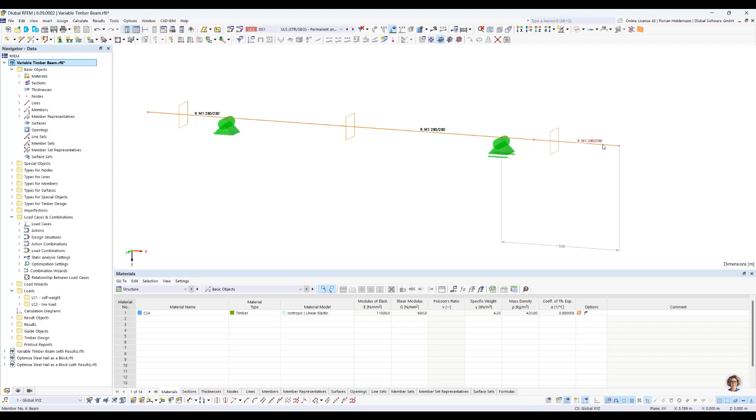So let's dive into the program. And as you can see here, the first model is a variable timber beam. This one has nothing to do with blocks at the moment. It's just for demonstration purpose of the new features I just explained in the PowerPoint. So what do we see here? We have an easy static system. It's a single span member, and at the ends there are some members reaching out on the left and on the right side.

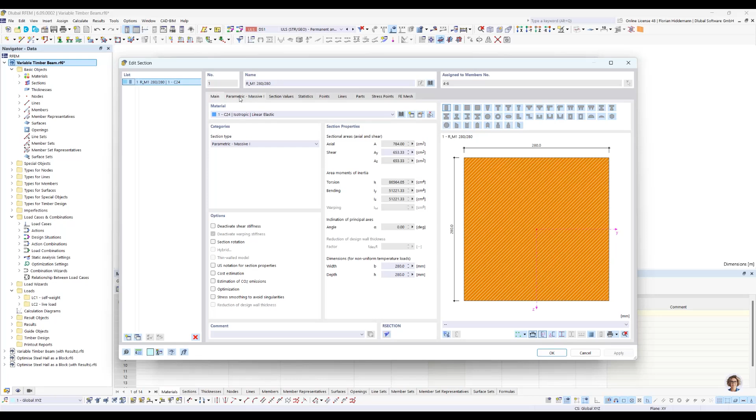It's a rectangular cross-section. And of course, when we are dealing with optimization, there are some global parameters in use. So we start here with a 280 by 280 cross-section with C24 timber material. And as you can see here, the cross-section width is given with a global parameter and the cross-section height also. In addition to that, the distance of the right support is also variable. I can show you now here the overview for the global parameters.

The beam length is just a constant, which is easier for me to make the model. The height is 280 by 280. The distance of the support is variable.

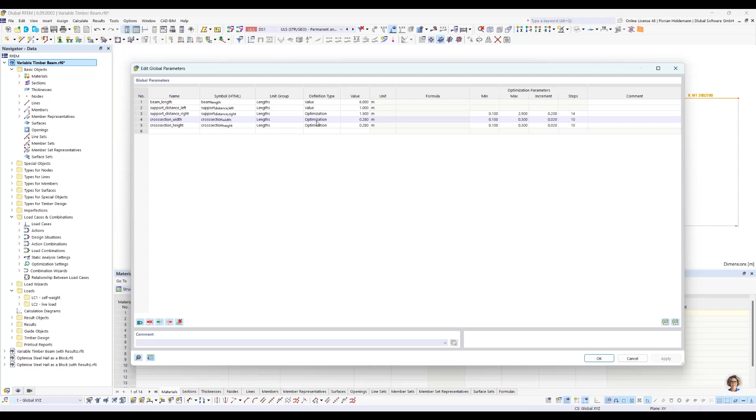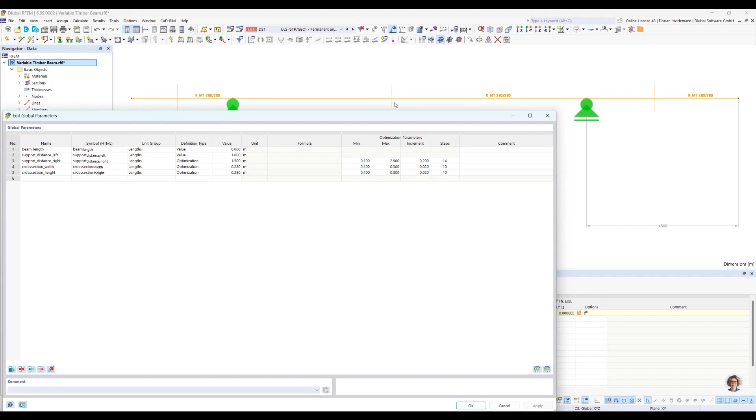And the left support distance here is just a constant. And we would like, in this little example, to find optimal solutions for the right-hand support distance, which is now 1.5 meters, and for the cross-section width and height. This parameter here, the support distance, can be varied in 0.2 meter steps from the right side up to 2.9 meters, which is nearly in the middle of the beam. The cross-section width and height go from 100 millimeters to 300, in steps of 20 millimeters. So you have 10 steps in between, and this is the variation this cross-section can take into account.

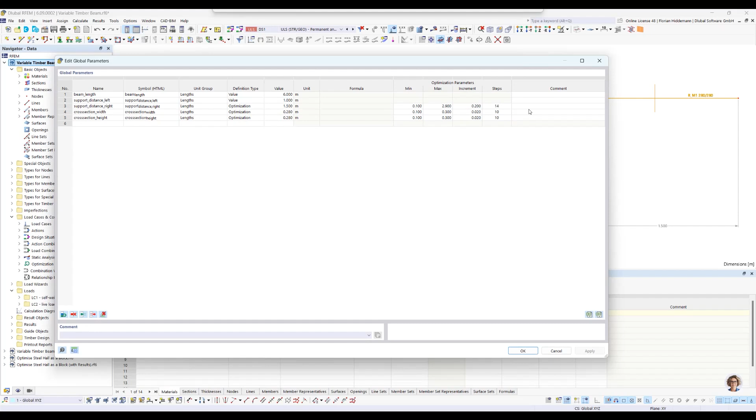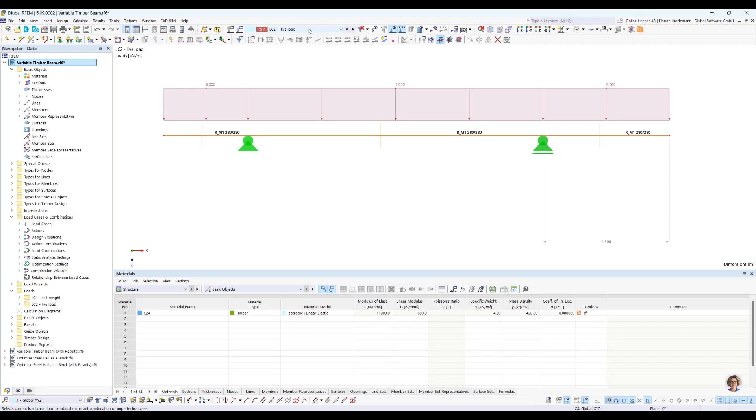So let's have a look at the first feature: recognizing valid mutations in the result list. For this reason, I activated also the Timber Design add-on. As you can see, Timber Design is activated. And I just made, for demonstration purposes, easy loads. You see load case 1 with some self-weight, and there's another load case with a live load. We use here the German National Annex, of course, and a combination with it.

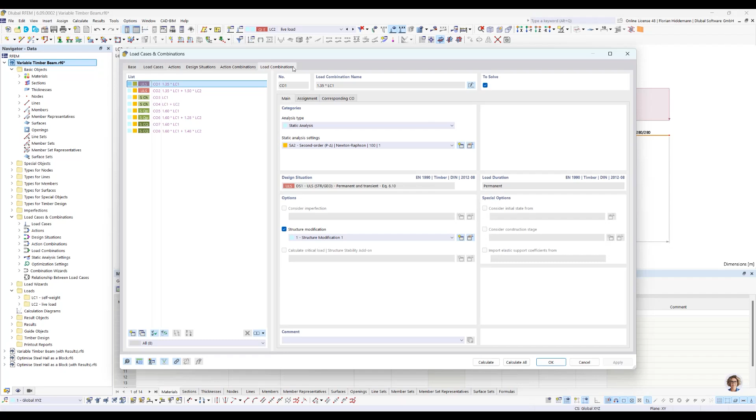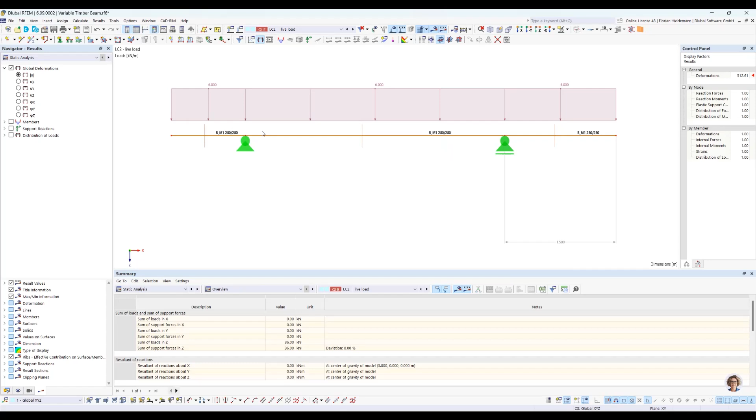So you can see design actions. It's all standard, which you are maybe used to already, that we do some combinations and design situations for you. So you don't have to worry about all the timber design specialties. So let's calculate the system in the first place to see what we are talking about here. So now it's a standard calculation without optimization. You can see in each run later on, all these calculations are performed for each mutation.

And as we can see in the governing results of the design add-on, everything in this configuration looks fine.

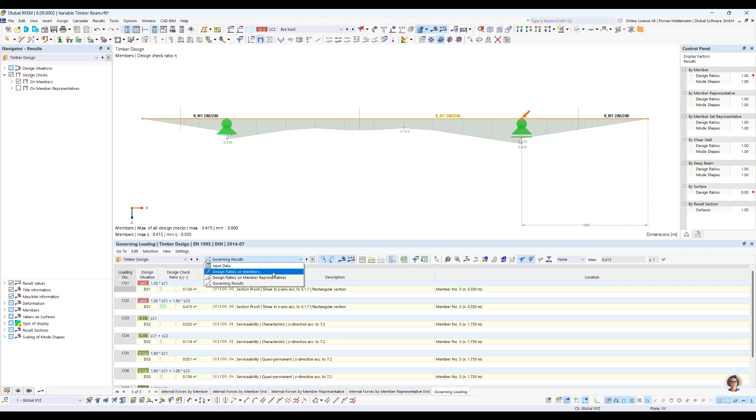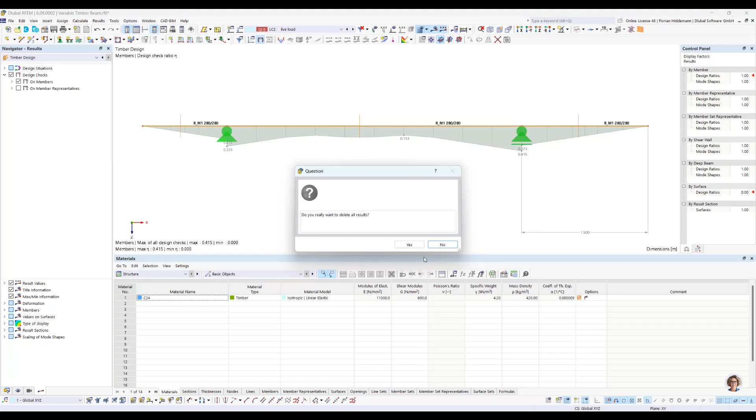But we are here to find out if there is an even better configuration or not, and to play around with our optimization feature to see what is happening there. So let's delete these results and jump into the optimization settings. You can find it here under Calculate if the optimization add-on is activated.

You can store different optimization settings. It's not necessarily one you have to fiddle around with. You can copy it, modify it, and use them for different purposes. This is quite handy because there are a lot of settings you can do, so you can remember each different optimization run later on.

So what do we do now in the first place? This feature I show you later on: this is the multi-stage mode, the multi-stage calculation. And even with this very simple system here, all mutations would have a total number of 1,815 optimization mutations. This is a lot if you consider that this is a very easy and simple system. And for this reason, we are trying to develop more and more time-efficient strategies to find in a fast way the optimal parameters for you.

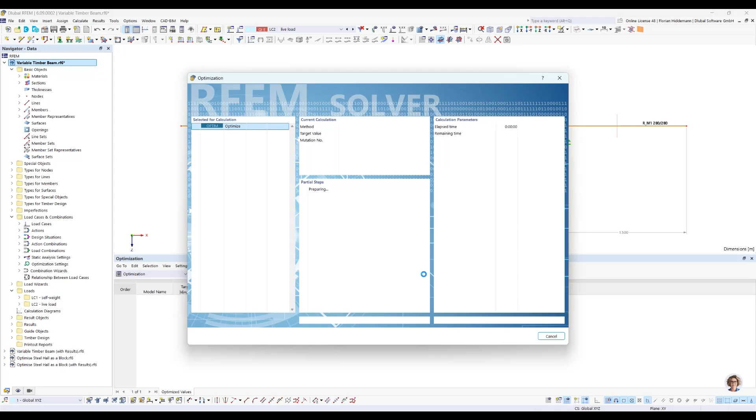As you can see in the background, the first iterations are calculated. Each one of these mutations is also calculated within the Timber Design add-on. For this reason, you see model number 1, calculated with these parameters, didn't fulfill the design checks. Model number 2, like in our first example, fulfilled it. With this algorithm, it's just a random mutation; there is no clear strategy for finding the optimal target value. The program is just giving random examples for these 3 parameters and collects all the results.

With this nice feature here, we can see easily which calculation fulfilled the design checks and which not. And now if I cancel this calculation run here, today I will be mean to this model and cancel it anyway. What you can see here, the calculations performed up to this point are stored. We have now 8 results. And as you can see here, the green checkmark means, it's very important to see it again,

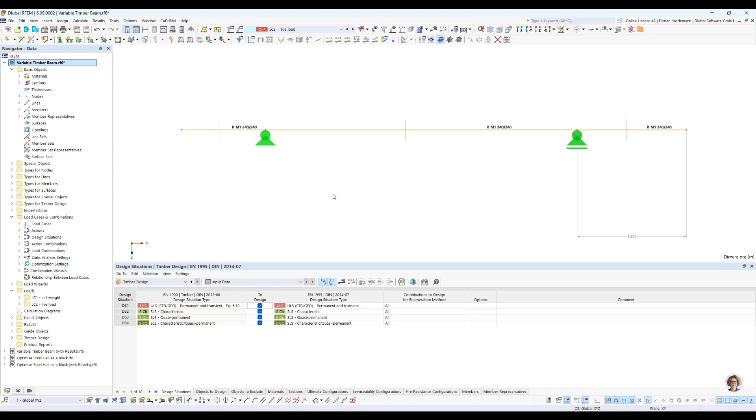this model is now active, and because I canceled the calculation run, the add-on doesn't calculate the last cycle. So if you jump into a new model in the list, you have to calculate the model itself. We store only the results you can see here in the list. Obviously, we don't store every full result calculated for each model. With a bigger model, that would be hundreds or thousands of results. But we collect the target value and everything you need to display this result table.

From this point, you can then regenerate your model, because the add-on varies the parameters as they are stored here in the model mutation. So for this model number 7, I calculated it now, and here's a green check mark. This means that every design check here is fulfilled.

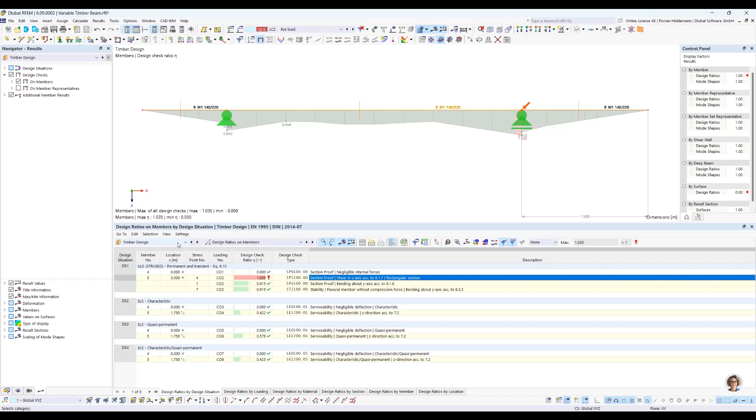So let's see model number 1, for example. I change it here and perform a calculation to see why there is a red exclamation mark. And as you can see, close, but it doesn't count. The section proof here at this point on the left side is not fulfilled. So this is the way this list works with these indicators.

The next feature: the results list remains consistent. It's easy to show now because I canceled the first calculation run, and maybe at a later point we would like to go for a new optimization run. So all I do now is say, okay, try to optimize it with a particle swarm, calculate 2% of the possible optimizations. As every time, I make the optimization cycle active. This is kind of a safety feature so you are really aware you're performing an optimization run and not doing it accidentally if you calculate all.

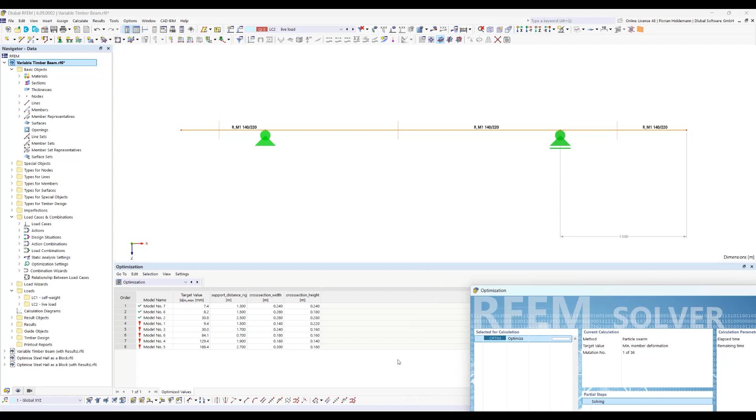Okay, so what will happen next? You can see the results list here is stored; there is no new list. This is a small feature, but very useful if you already spent some time calculating your model, because now the optimization add-on checks each new mutation. Before it calculates it, it looks into the result table to see if this mutation was already calculated. If so, we jump automatically to the next mutation without calculating it. And if the model mutation is a new one not stored in the list, the add-on just calculates it and adds it, like you can see here in the background.

So as you can see here, now it's more straightforward because the particle swarm is a solving algorithm which tries to vary these parameters with the target value in mind. And the more you calculate, the more it is getting, let's say, a mathematical feeling, which parameter needs to be adjusted in what way to achieve the best target value, which is at the moment the minimum member deformation at every point.

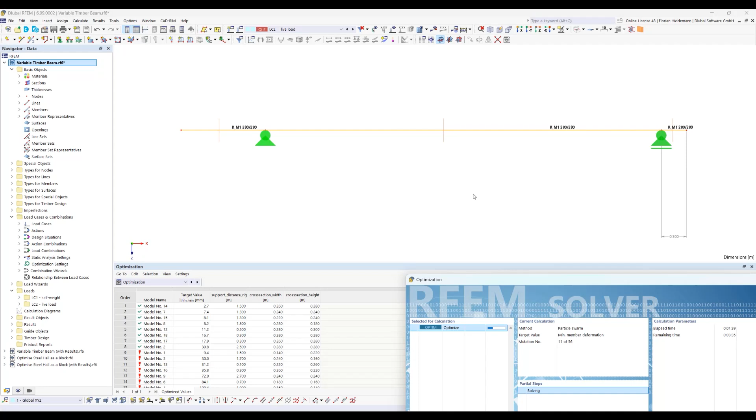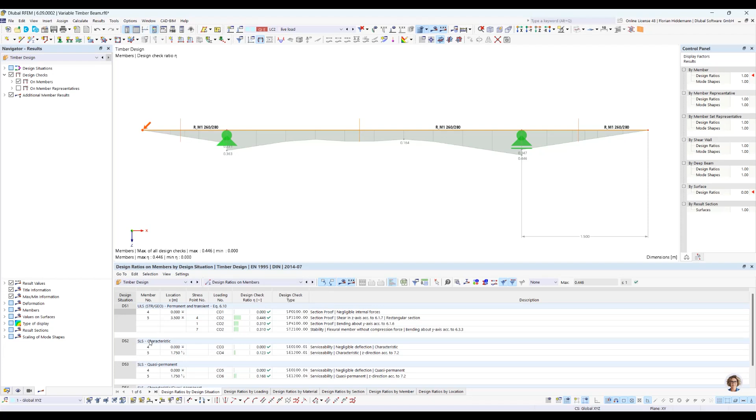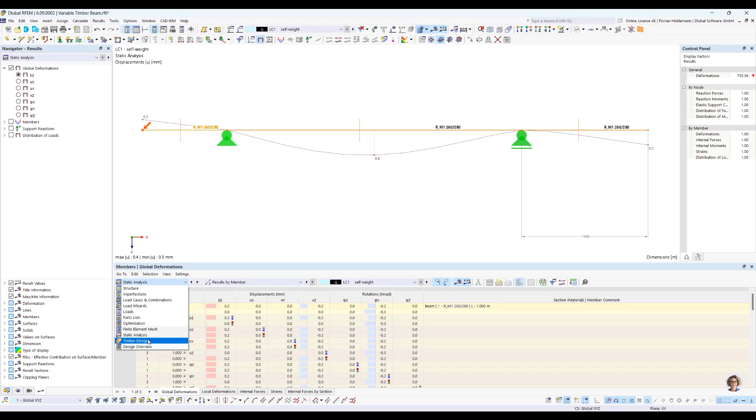So the 2.7 millimeters, let's have a look into the program and cancel it again. Because we abort the calculation, I need to perform a manual calculation of the system here. So let's see. Every design check is fulfilled. And for the target value, it should be there. I go to the other model. Okay, I found it.

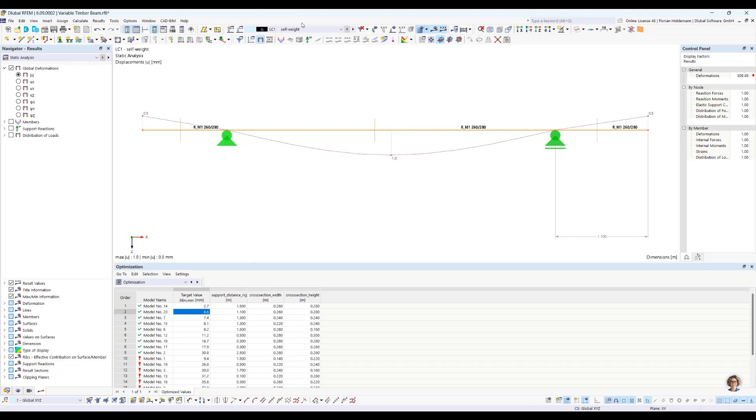Okay, we are looking for 6.6, and this is considered over all design situations you set up. So if I go to the maximum load here in design situation 1, the ultimate limit state, you can find this part here in the members is 6.6, and this is considered as the target value. It is looking for a global minimum to minimize the maximum member deflection at any given point. I give you some time to let it sink in.

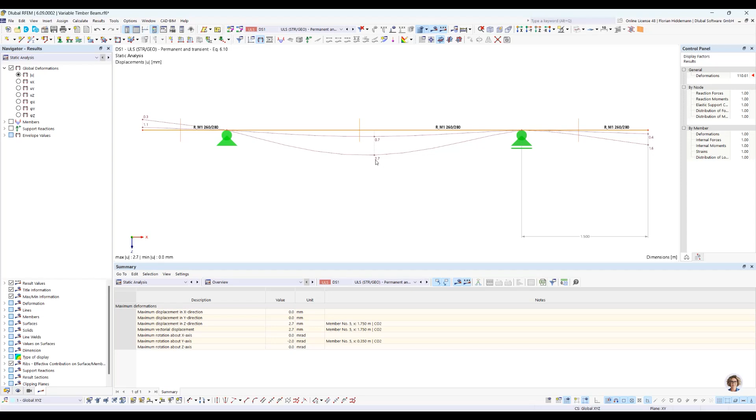And now we are able to find the 2.7 millimeters, just to be sure what is going on here in the background. You can see the 2.7 at this point. So this is a small introduction example for working with the list here and the ability that it stores every optimization run. Let's go to the next topic, the sensitivity factors. What is going on with that?

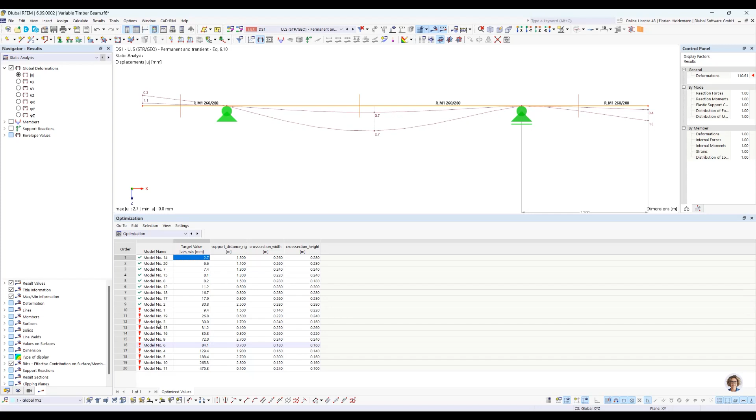In the model now, we have 20 model mutations calculated. And now here in the table of the parameters to optimize, you can see some sensitivity factors. They are estimated from the model results list here. So we can now perform an analysis of how the target value is influenced by varying different parameters. This estimation gets more accurate the more models you calculate.

With this small amount of 20 models, you can see the cross-section height has a big impact on the desired member deformation, a much bigger impact than, for example, the cross-section width. If you're familiar with how the stiffness in such a system works, that's absolutely plausible, because the height of a cross-section goes with the third order, and the width with the first order into the stiffness of this beam. So it's a very plausible result.

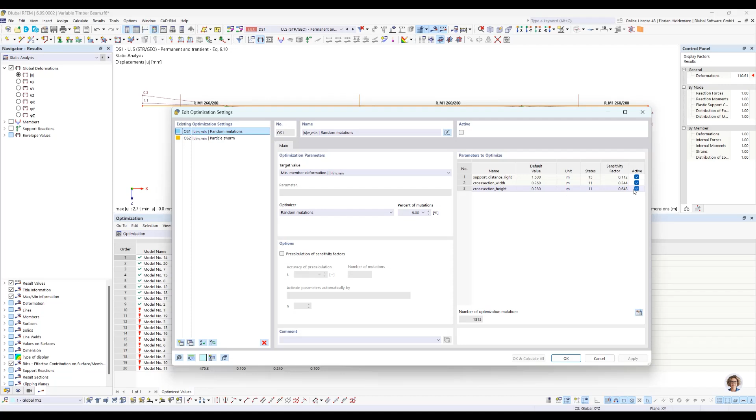And these two parameters have much more influence than the support distance. That's something you can already see in this little model. Here it's easy to have an overview by yourself, but think of more complex situations where you vary different parameters and you don't have a feeling for what would happen if you vary different combinations. This is very nice to reduce the number of optimization mutations, because you can choose, okay, if these ones are so impactful, why should I spend my calculation time varying this one?

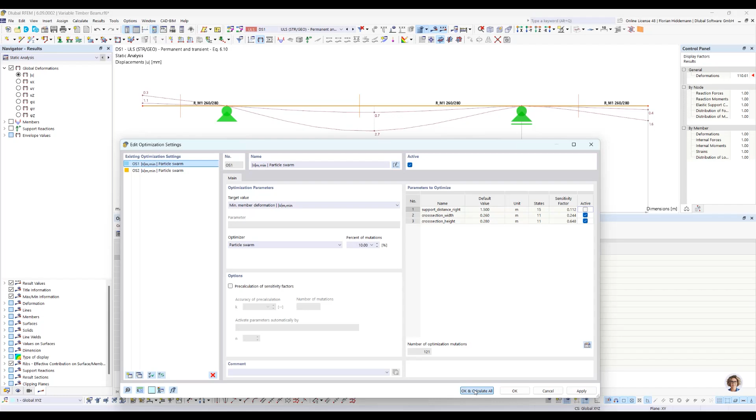And as you can see, it reduces the number of optimization mutations drastically, because now it's 11 by 11 and not by 15 anymore. So here we have 121 mutations. And this is much easier for the algorithm to find potentially better mutations. So now, because I set only these two parameters as active in this dialog, the model is fixing the 1.5 meter support distance and just varying the second and third one.

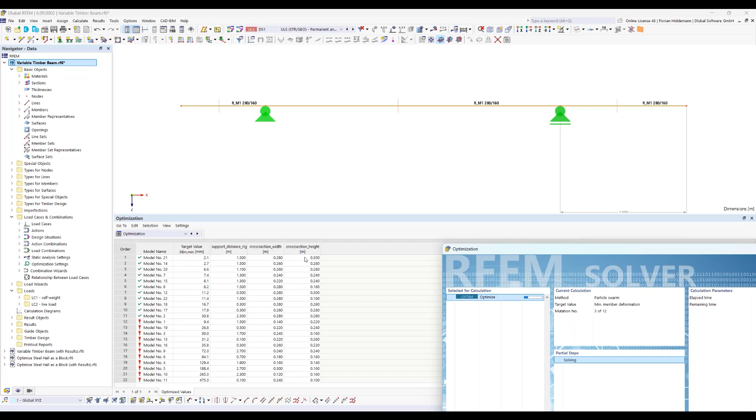Okay, this as a basic introduction and reminder of our new features at this stage. I can show you the multi-stage calculation as well, and for this reason I go back into the settings, and we choose other optimization settings here, and now we have a look into these options here: the pre-calculation of sensitivity factors.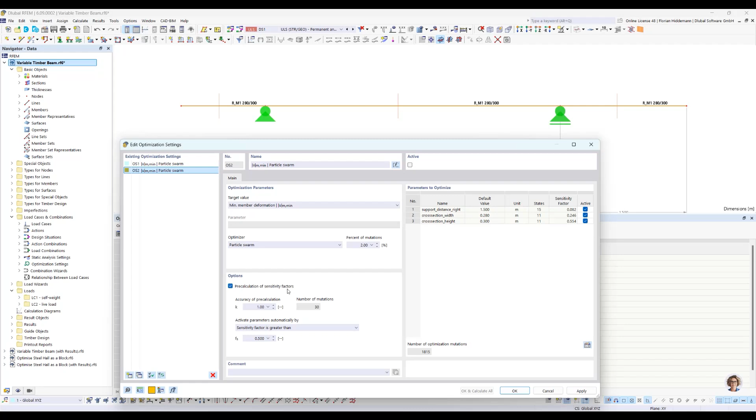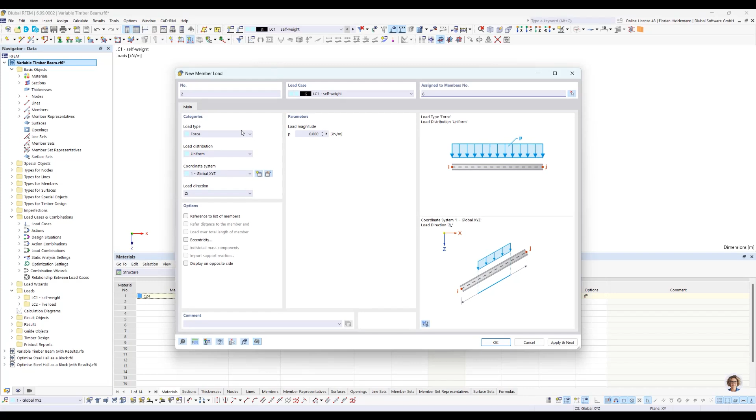For this reason, I will empty this list by varying the model. This is something you need to do now, because the list is stored. What I do now is delete a load here. And if you change the model in a drastic way like this, all the results are deleted. So be aware that this will have an impact on your optimization results. So now we can start with a clean structure here. And for the next run, I say, please make a pre-calculation of the sensitivity factors.

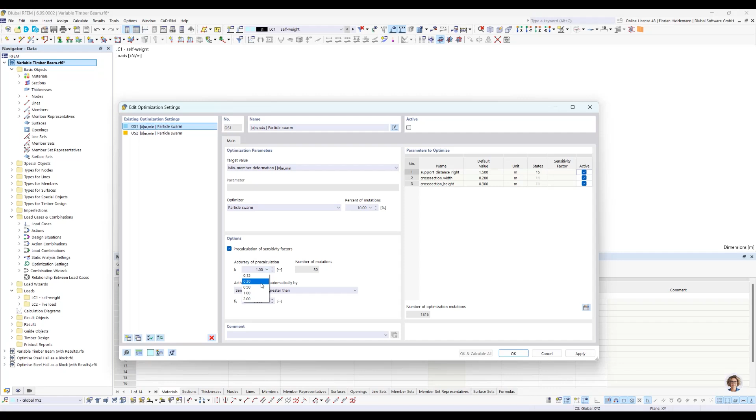And in this example, let me make only a small guess with, let's say, 4 mutations. And after that, the program should automatically combine 2 parameters in each following optimization run with the highest sensitivity factors. So it's kind of a bit abstract and complicated, like most of the things with this add-on, but let's see what is sticking behind.

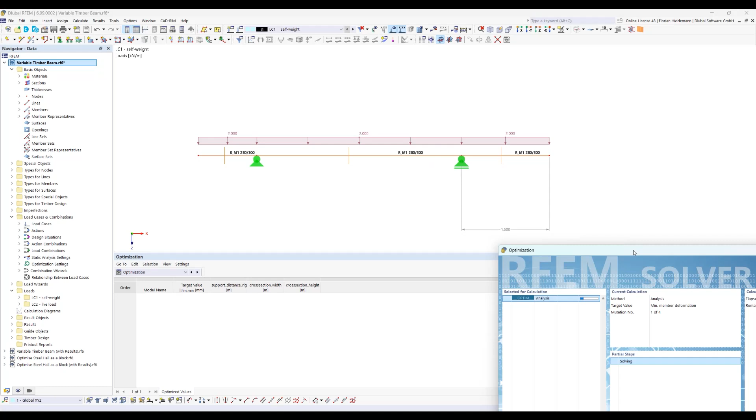So now we have a multi-stage calculation. In the first place, we are doing the analysis. So the model is now varying some parameters with a very small amount of models to guess the sensitivity factors. It's analyzing the results here and the estimated impact of these parameters to those result values. And as said before, the more mutations you calculate, the more accurate is this estimation.

And now it goes to a second step. It uses now the results from the analysis. And here it is now combining the two most influential parameters with a particle swarm that calculates 10% of these possible combinations. And the 10% is now only 16, and it's not 181. I'll show you it afterwards. And you can see after this optimization run, there is another optimization run waiting.

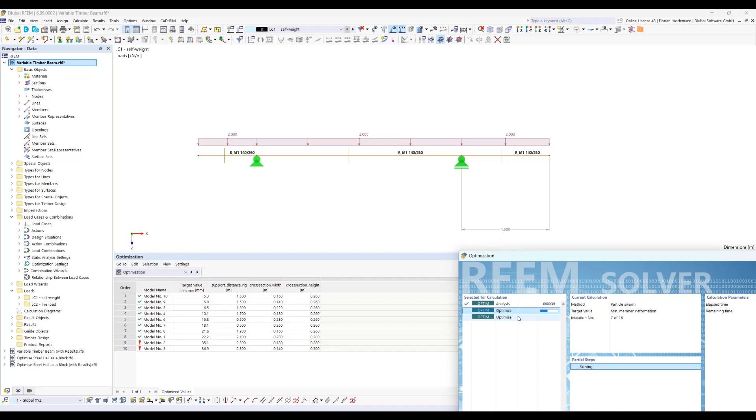And in the next optimization run, the program goes further and says, okay, I have now combined the most influential with the second influential parameter. And just to check it in another run, I go through and perform a calculation with the second best parameter and with the third best, because you chose to combine two parameters at the same time. And this is the strategy the program is choosing to go through these combinations.

So the total amount of calculations is the first one from the sensitivity factors, 4 in this example. And after that, it's here 16, and then depending on the other value, around 15 to 20. And it's much less than 10% of all 1,800 model mutations. Here is only one. Interesting.

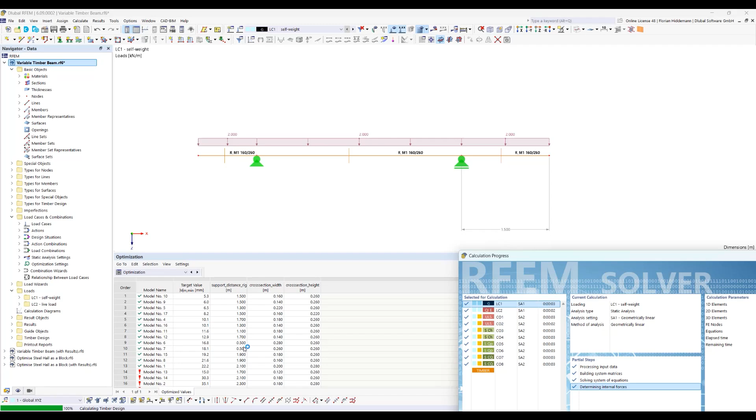So let's have a look into the dialog, what could happen here. As you can see, we have with only 17 calculations quite some optimized results. But with a small amount of calculations, the sensitivity factors are not guessed very properly. Here it's now a very big difference on these ones. And you can do it better by giving here more accuracy of the pre-calculation with, for example, 30 mutations.

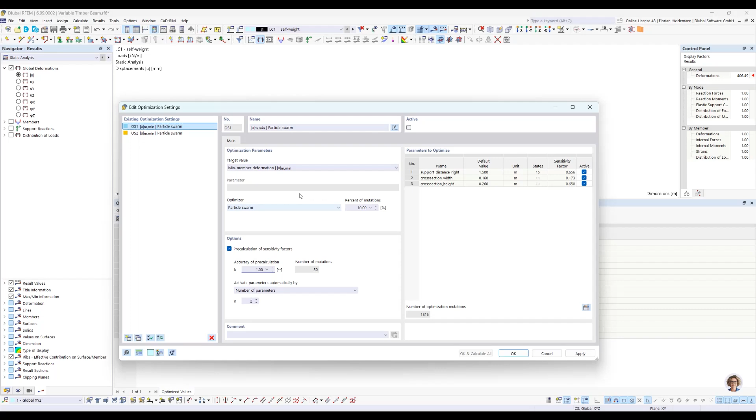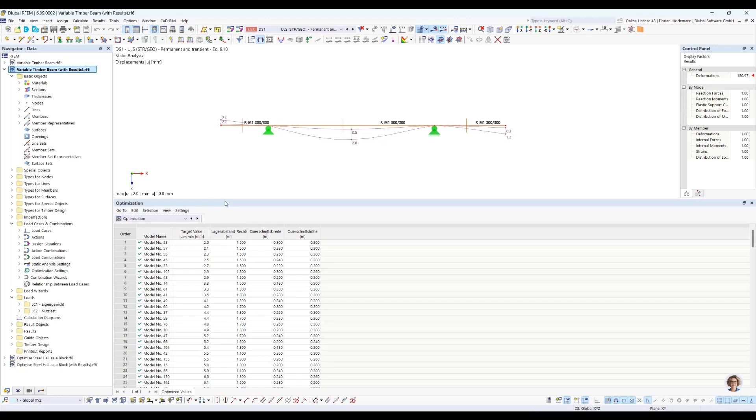So our recommendation here is to choose higher numbers if you feel the calculation is not so straightforward, going to the point afterwards. But this for now, to demonstrate the possibility of our multi-stage calculation run. If you have already done more calculations, I switch to the same model here. And I did a pre-calculation. So we have here 217 calculated models.

As you can see, the sensitivity factors here are more accurate now, because there is a big result list which is analyzed. And this is much more plausible from an engineering point of view. What is interesting now is that that's also a nice feature. It's new because we have a consistent result list now. You can change the target value afterwards.

So for now, we did the minimum member deformation at a specific point as a target value. So obviously, the height of the cross-section, the width of the cross-section, and the support distance. I'm sorry that these are German words here. If I had translated them, the results would be deleted because it's changing the model. So I'm sorry for that, but I hope you can go with me. This is the support distance on the right side, the width of the cross-section, and the height.

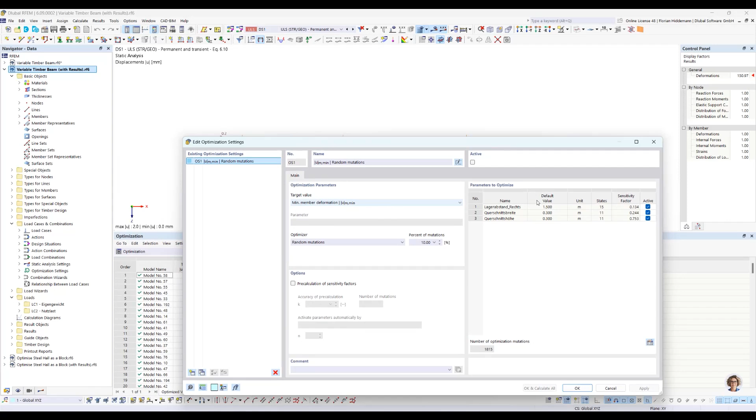And obviously, the support distance should have no impact on the weight of the model, but the height and the width should be more or less equal, right? Let's check it. And we switch now to the minimum total weight. And as guessed, these sensitivity factors are now changing, because now if you are varying the width and height, these influence the area of the cross-section in the same way. And guessed correctly, it's quite equal.

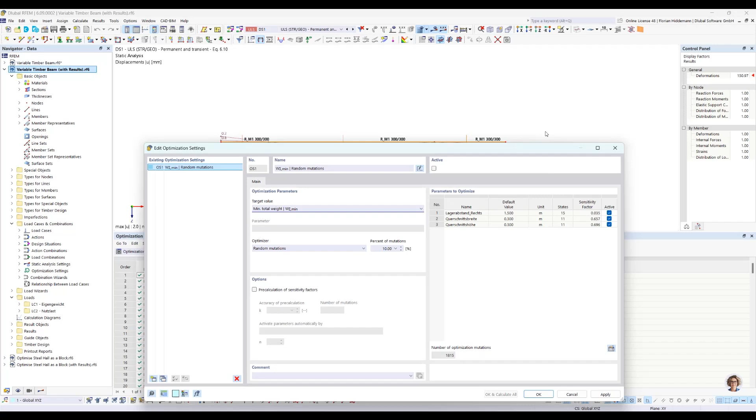And the load distance, or the supporting distance here from the right side, has in reality absolutely no impact on the weight of the construction, because it's just a load bearing point. What's interesting, the more you calculate, the more this value will go to 0, because it's an estimation based on the list here, and our algorithm is already seeing with this amount of results that the influence on the desired target value is very small. So this is quite nice to see what you need to vary in your model to achieve specific targets.

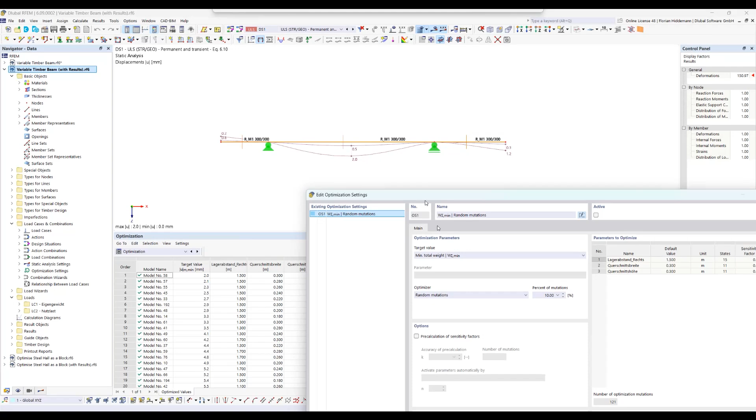You can see here that in the list, if I change the optimization value and start a new run, so let's do it with a particle swarm. Just started. Let's see what happened. It's now changing. And this is also a strong feature. You can use all your existing calculations for this.

So we have now 200 already existing calculations. And because we stored the target value in each previous optimization run, as well as the desired minimum deflection, if there are surfaces, the minimum surface deflection, and so on. So every available target value is stored with each mutation, even if you didn't activate it in the dialog.

And this is very useful if you have different perspectives on your construction and you want to try out, okay, which one is the best for the minimum total weight and which one is the best for the minimum deflection. It's the first step into going to multi-target optimization runs. Behind the scenes, we are already thinking about those features, but it's a small step, step-by-step way going to these goals.

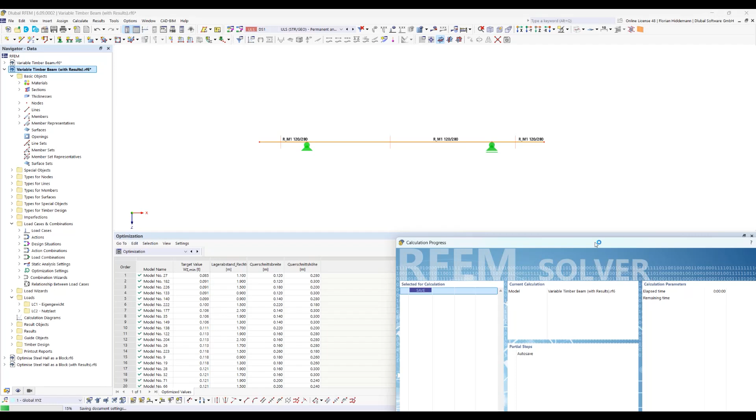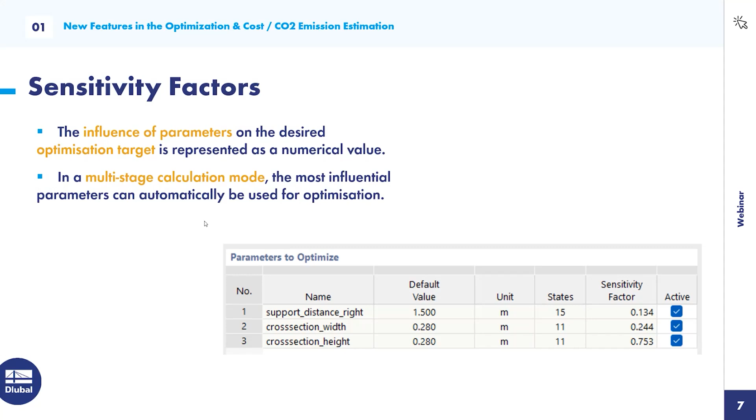Okay, so now you saw everything. We can change the optimization targets. We store it across different optimization runs. We have a multi-stage calculation mode, and maybe you are already waiting for the title-giving feature of this webinar, the optimizing blocks.

This is just an inspiration because maybe you found out in the past, if you are working with global parameters, there are some restrictions, because global parameters are very, very useful to play around with the geometry of your model. And you can use it in so many input fields that are quite helpful to steer your model and create the geometric system you would like to have, and also can add static values, resistance values in many different ways.

But maybe you experienced also some restrictions when it comes to demanding construction rules. If you have a more complex statical system or construction you want to try out, you can use a block, because blocks are perfectly fitted to generate your model with your own specified rules, algorithm, programmable, and with a block, you can build your own configurator. And this configurator for itself takes input values.

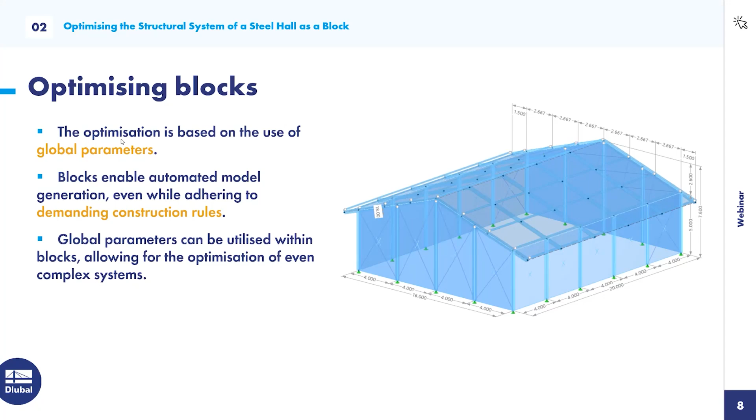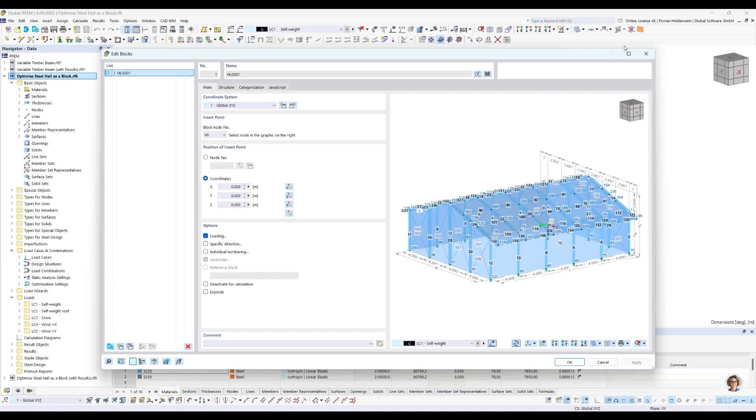And for today, I will show you how to use the optimization together with a specified block. So I've done some pre-work here because this needs some time to set it up. And so I would like to present what I did here and to show you what is special about this model. So in this model here, as you can see, this is everything. It's a block. In the webinar next week, you can see, if not already known, how to edit it, how to import it from the Dlubal Center. Here for the moment, let's just stick with the idea.

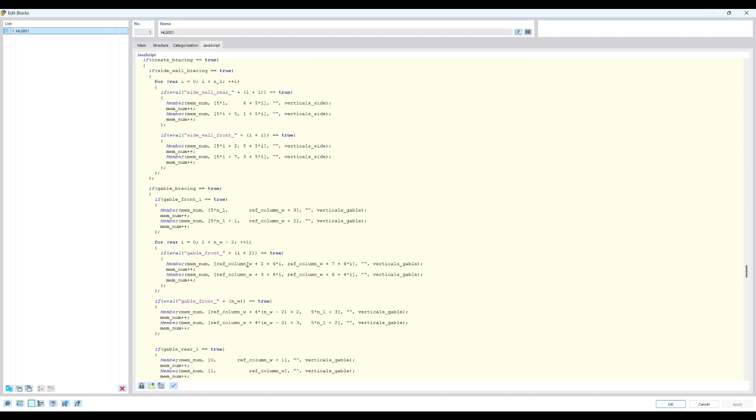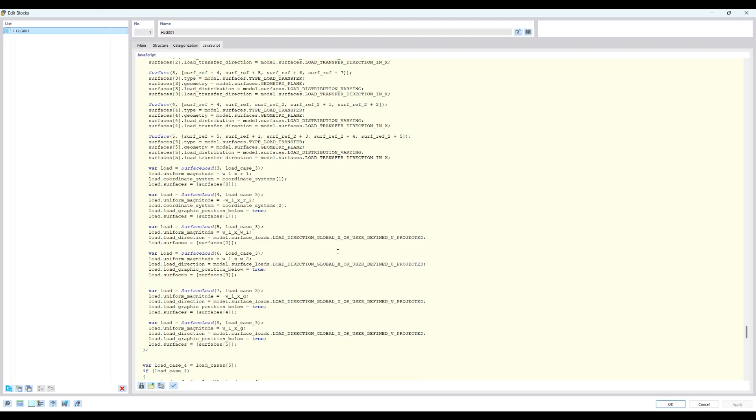A block is a programmable object where you can define in JavaScript what is generated, what is steered. It's using internal features of our programmable API. And here at the moment, what you can see here is JavaScript used as a language for this. So as you can see here, the whole steel hall is defined with these functions and API calls.

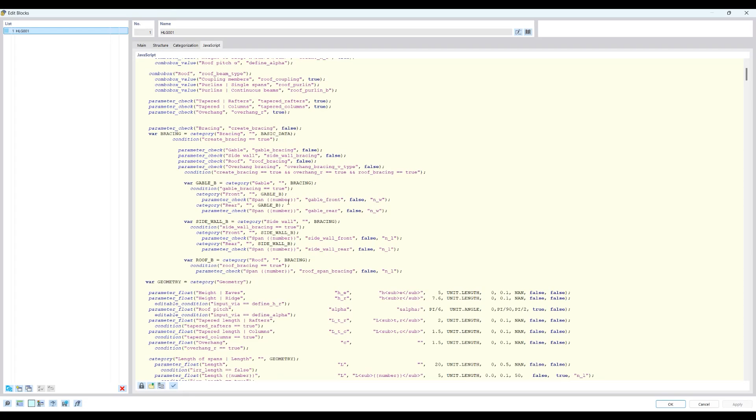What is provided then, based on the structure here, you also define a parameter structure, and depending on what you are programming for the block, you have now your own input fields you use in your program. And this enables you to work with more complex structures.

For example, this block is programmed in a way that automatically a bracing is activated here. You can see it here. If I unclick a checkbox, the bracing is updated. It generates in the background a total new model. The numbering is different. Everything is different.

So have in mind that you can play around this, just the borders within your fantasies and your abilities to work with JavaScript, obviously. But you can really do some fancy stuff with it.

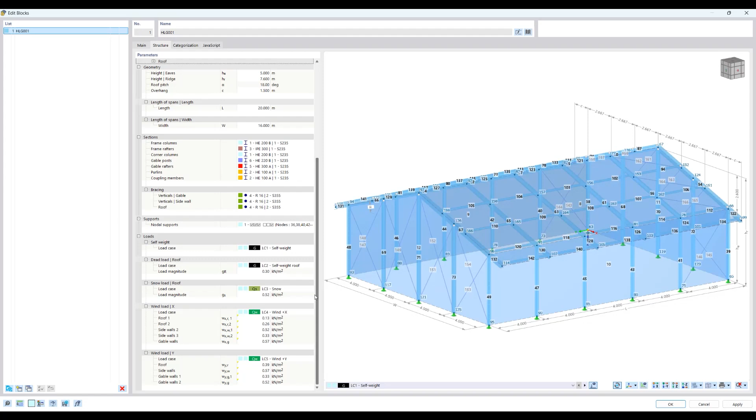I set it up here, the input fields, to connect it with the materials, cross-sections, and everything which is in my model. And just here for, let's say, a pre-calculation as an example, I added some easy, yeah it's leaning into a realistic load case scenario, but we are not rebuilding here our wind load generator or snow load generator. This is just for a demonstration purpose and to give you an idea what is possible with blocks.

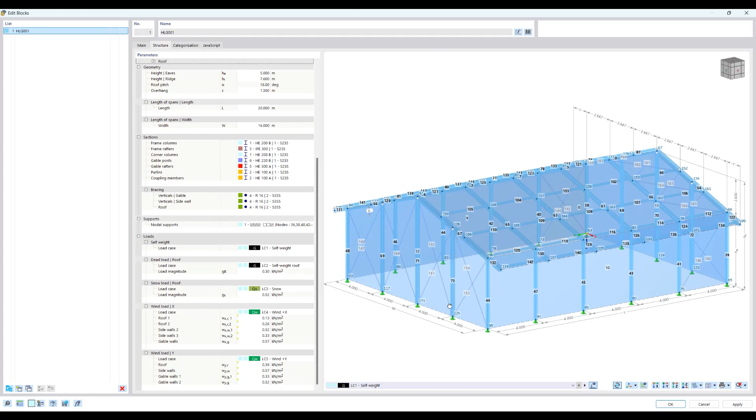And if you have an engineering problem which is worth spending some time with, which you are doing with a lot of repetitions, or you need to optimize it and there is something you would like to dive more into, have in mind that you can program a block and then connect it with a global parameter. That's a trick for today here.

I can just edit, for example, the number of spans in the width. So let's change this to 6. And we will see that here in the gable walls, the members and the bracing have changed completely. The whole structure of the steel hall is now different. I go back and change it to 4.

So what I've done here is you can just use a global parameter in this input field. And as global parameters here, I have defined the span counts in the length direction and the span counts in the roof. Yes, and those values are defined as an optimization type.

So this is a trick for today. We will optimize and play around with the span count, length and roof, and vary them from 3 to 8 and 5 to 12. It's 5 by 7 steel halls you create then in the background.

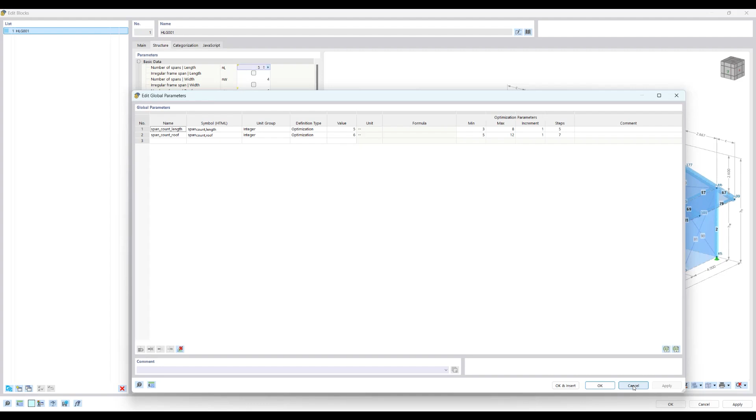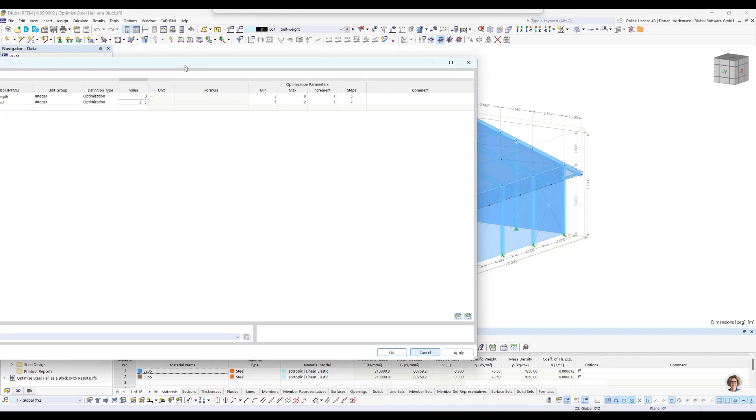And I will show you what is happening then if you use it in this way. So let's just go back here. Now, as explained, you can see in the construction what is happening. If I change this to 3, and this one maybe to 4, it's reconstructed.

And this is, I think, a magic way to define even systems with different statical conditions. Everything that can use a number, a Boolean variable, whatever, you can use later on in a block and make complex, design complicated algorithm-based construction rules. And together with the power of the optimization tool, you play around with this block to achieve a global state of optimal target value.

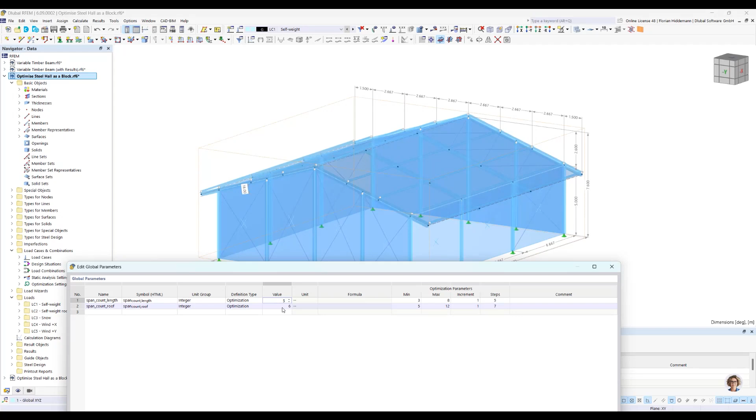So let's go back and start with maybe 5 and 8. I press apply and you see it's a totally new construction. But, oops, I disconnected my table here.

So this looks interesting, maybe, and I don't want only to consider different field spans, because if I choose less fields, I need stronger cross sections. And otherwise, if I have more fields, I would expect that my cross sections for the columns and the bearings here on the coupling members has to be much smaller.

So don't forget, you can use our optimization add-on in combination with cross sections. So let's say I want to use these cross sections in my block, and again everything is generated and defined by one block you can see here.

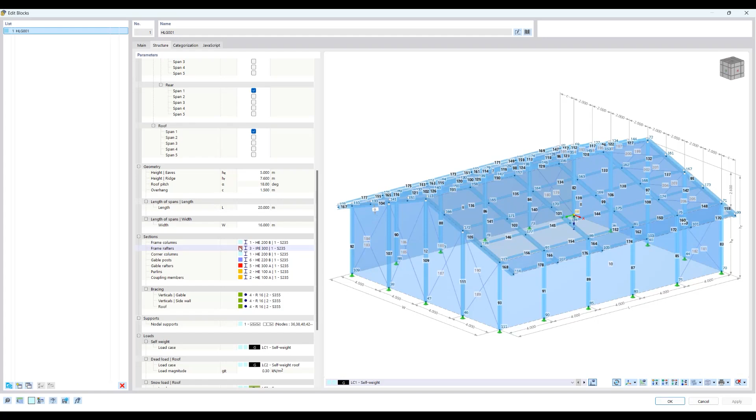Yeah, I connected these cross sections here to the code in the JavaScript. And now I can go to RFEM and say, please optimize this cross section I used. You only have to click here, and this enables the optimization feature for this member.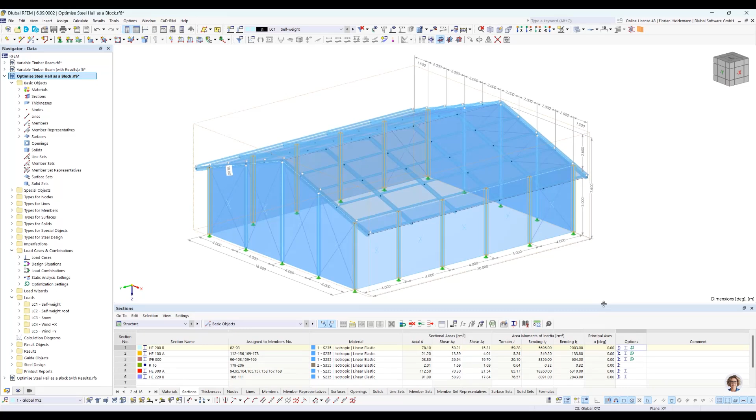Let's jump in the optimization settings. Here you can see, yeah, let's try it out. If you combine only the states for the length and roof, you have 48 steel halls, because it's taking also the minimum value and the maximum and the steps in between into account as a state. And if you multiply it with all possible variations of the cross sections, you get almost 500,000 possible steel halls.

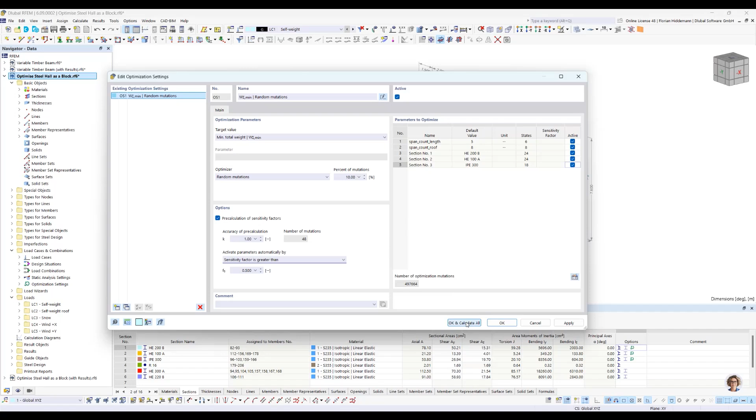And who of you wouldn't like to calculate them all by hand? For me, at least, it would be painful. So I rely on the multi-stage optimization run, and I want to see if there is some construction winning the game for a minimum total weight. I want to have calculated in the later run only sensitivity factors which are greater than 0.5. And in the first run, pre-calculated with 48 mutations. So let's just test it.

Now, I'm totally aware that this is not the end of the story.

If you have a system which is quite optimal in this way, and you have done many steel halls or comparable projects in the past, of course you have to work in a more detailed and specific way later on. But it gives an idea what is possible if you program complex structures, because you can define almost everything which a design add-on also needs in the background to evaluate this.

Remembering our little green and red indicators in the resulting list, the green arrow means the first steel hall here is obviously heavy, but it's a first random mutation. This one is fulfilling all activated design verifications from the steel design add-on.

Imagine you have a very complex structure with different blocks. You can put a steel hall as a block into it. You can put a small next building as a block into it. You can adapt staircases as blocks.

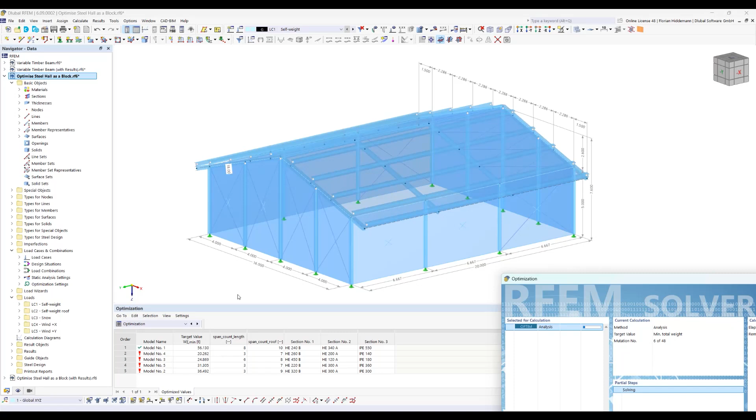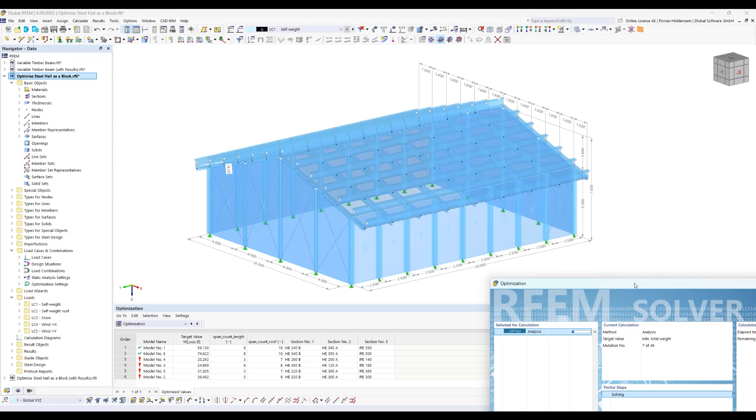So this is happening here, and after the analysis is done, the algorithm would choose every sensitivity factor over 0.5 and combine it later on. It will do some other stages after this optimization run, but for the moment, please have in mind the new feature is multi-stage. It's faster than a single one with 500,000 possible combinations, because it's more target-oriented, considering the most influential parameters and only combining them in different multi-staged calculations.

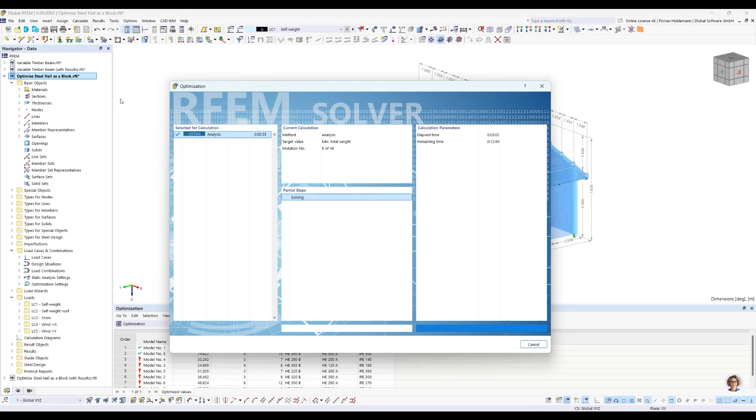So in the end, let's have a final look into the results I calculated with the steel hall in 3 to 4 hours here on my laptop, to see what is possible.

In preparation of this webinar, I calculated this model as well. We have 840 calculations; I think it cost around 3 or 4 hours on the laptop. As you can see, it's a very big variation of valid and non-valid models.

The heaviest valid model is 100 tons, with obviously a lot of fields and HEB 1000, some big profiles. It's a little overdesigned, safe to be in. Maybe a bit heavy, but you can also go down to 16 or 17 tons for a 20 by 16 meter steel hall.

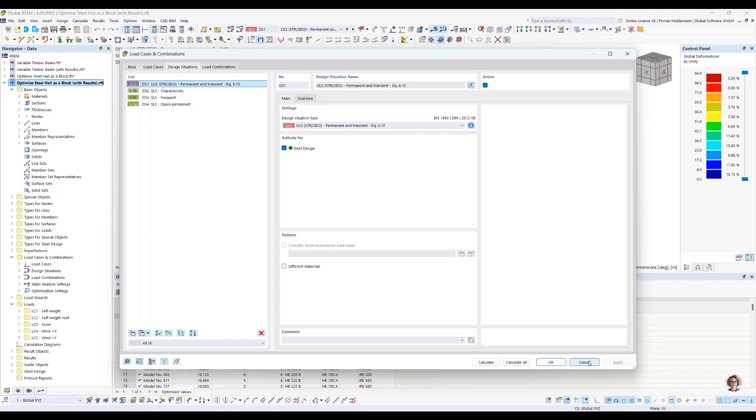In this optimization run, I only considered some ultimate limit states. I deactivated the other design situations for time purposes, but if you let it calculate overnight, you can activate everything you need for a real-life calculation, as you'd use with RFEM every day. It's just more time consuming to let it run.

But if you don't want to spend time on your local machine, remember you also have the possibility to calculate in the cloud.

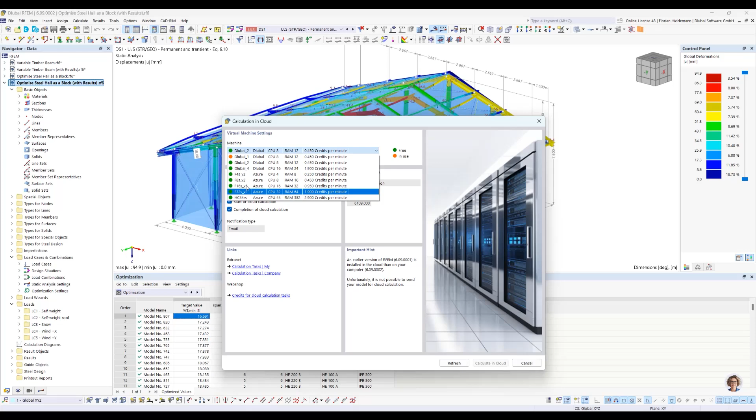Next week there's a nice webinar—remember, cloud calculation and blocks. So you can also go to the cloud, and you have these machines available. You can put your system into the cloud calculation, let it calculate, and get the results after that. It's then maybe a better inspiration for how to adapt improvements on your model with this technology.

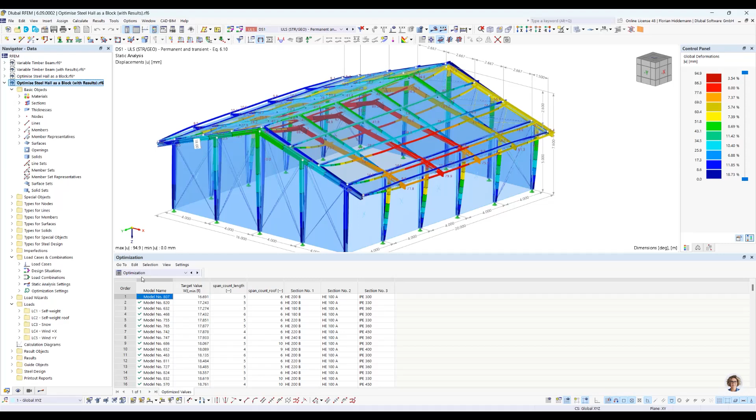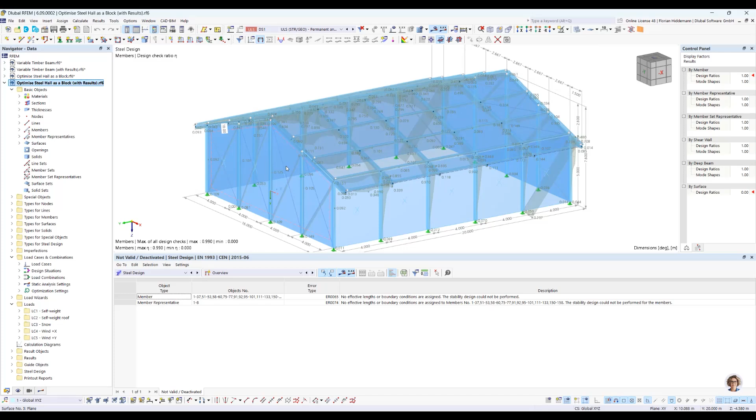Let's have a final overview from steel design. Here, in the block, there are no effective stability designs defined. You can, of course, do it; in preparation of this webinar we just didn't do the whole job to add imperfections or stability cases into the members, but you have here a full check of everything else according to Eurocode 3.

As you can see, the best hall here, with nearly 16.9 tons, fulfills the design checks, given a maximum usage of 99%.